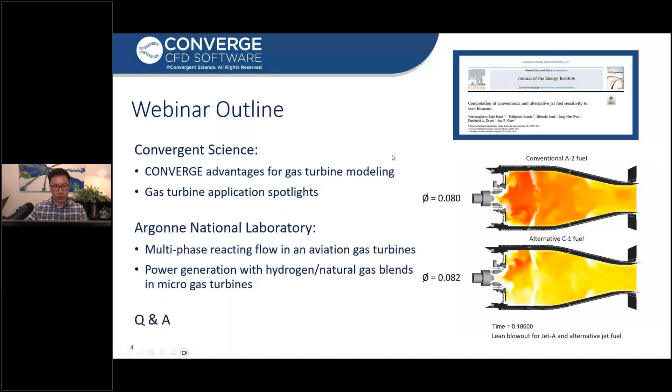One advantage of using Converge is its autonomous meshing capability. For instance, in this video you see on the right, the fuel is injected as Lagrangian particles. It evaporates, mixes with air, and combustion happens. The geometry of a gas turbine is usually complicated, with very small effusion cooling holes and large combustion chambers, which makes it challenging to manually generate the mesh. Converge has the capability to automatically generate orthogonal cells, as you can see here in the center region of the combustion chamber. The mesh is automatically generated, which spares the user time needed to manually generate it.

On top of that, Converge can automatically detect the regions where the change in temperature or velocity gradient is high, and the mesh in those regions will be automatically refined. As you can see here in the close-up view, in the regions where the temperature gradient is high, Converge automatically refines the mesh there. This feature is called adaptive mesh refinement.

And it can automatically resolve combustor flow and propagating flames at low computational expense.

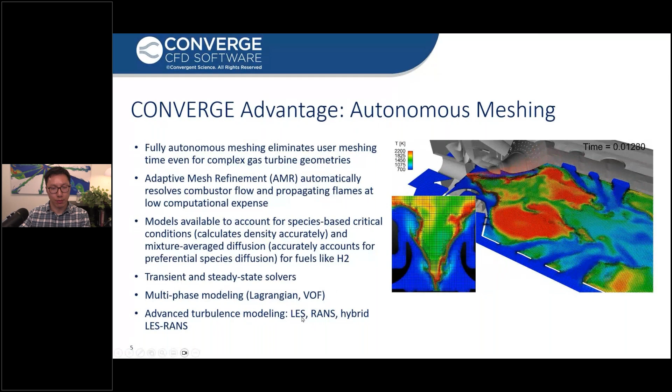You can also treat this as Eulerian phase using the VOF model. We have advanced turbulence models such as large eddy simulation, LES model, RANS model, and a hybrid of LES and RANS model.

Another advantage of using Converge is our detailed chemistry solver, which is efficient even with large mechanisms. It can accurately simulate ignition, premixed flame propagation, lean blowout, and emissions of NOx, CO, soot, and unburned hydrocarbons in gas turbines.

For instance, in this video, you can see that the fuel and air mixture is ignited at the center of one of the burners, and then the flame propagation is successfully predicted by the detailed chemistry. And at the end of the simulation, the flame propagates to relight all the other burners.

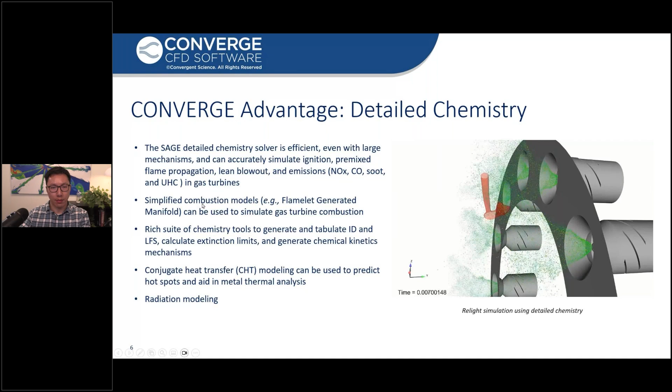One problem with using SAGE is that when you have a large mechanism, it's very time consuming. So there are some other simplified combustion models that you can use in Converge, such as the FGM model, that can be used to simulate gas turbine combustion at a much lower computational cost.

However, if your mechanism is small, then there's very little difference between using SAGE and FGM model, and SAGE is always recommended. We have chemistry tools to generate and tabulate ignition delay and laminar flame speed, calculate extinction limits, and generate chemical kinetics mechanisms, which I will talk about more later.

Converge has the capability to do conjugate heat transfer, also known as CHT modeling, which is important to predict hotspots and aid in metal thermal analysis.

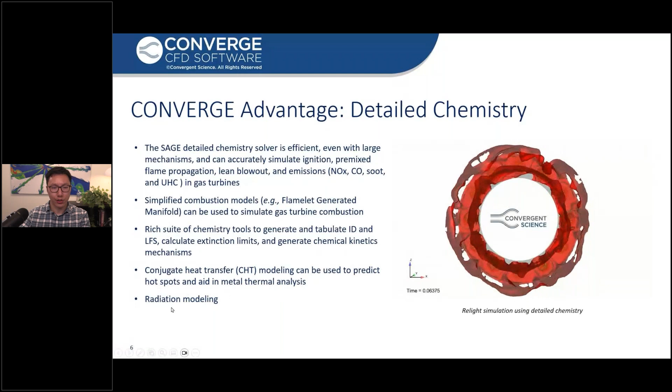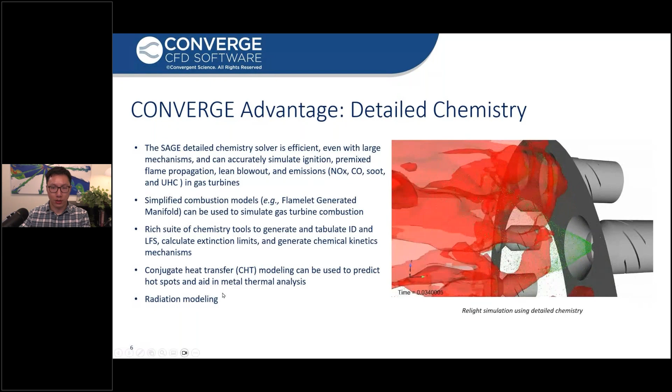We also have radiation models, which is an important effect in combustion, in gas turbine combustion. Without it, the temperature tends to be over-predicted because we didn't consider the heat loss due to radiation.

Converge has superior scalability, as you can see in this figure, with more number of cores. With our high performance computing capabilities, Converge simulation can speed up linearly.

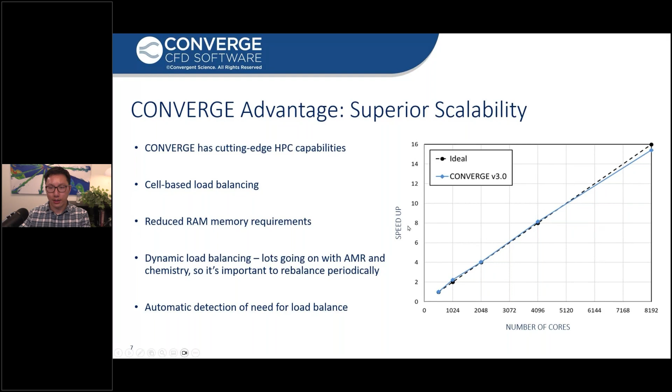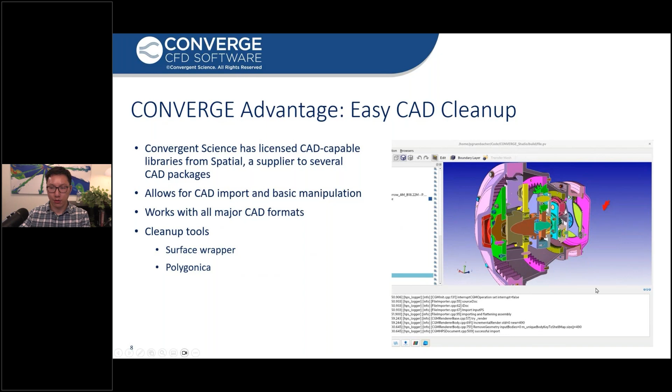We also have easy CAD cleanup. Our users can generate their surface geometry in third-party CAD software, such as SolidWorks, and then the surface geometry can be easily imported into our software. And if there's any surface defects, Converge can help you fix those defects by using the proper tool.

Converge has multi-fuel chemistry, which is a combination of research results from a few research institutions across the globe.

The integrated mechanism is called C3Mech version 3.5, which has 3,700 species and 16,000 reactions. This is a very comprehensive mechanism, and the user can extract part of this mechanism for a specific fuel.

Such as you can extract the mechanism for hydrogen, which only has 12 species and much fewer reactions. You can extract the mechanism for ammonia, natural gas, or a combination of multiple fuels.

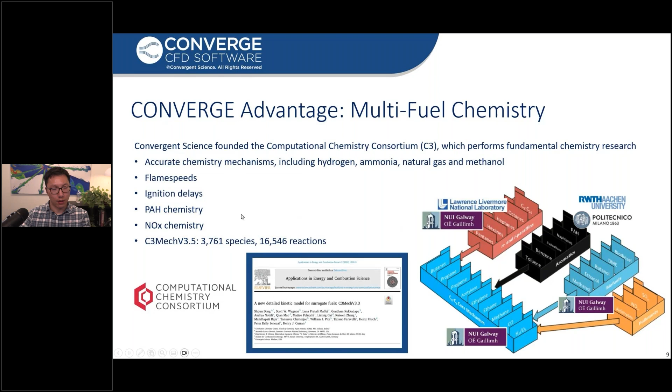The flame speeds and ignition delays under different operating conditions are validated with experimental results. And the C3 mechanism has polycyclic aromatic hydrocarbon chemistry, which is an important precursor for soot prediction. C3 also has NOx chemistry, which is useful in predicting NOx emission at the outlet of a gas turbine.

This video shows how the conjugate heat transfer simulation looks like using Converge. And as you can see here, the fuel is injected as Lagrangian particles. It evaporates into Eulerian gas mixed with air, and combustion happens, which has some high temperature region.

This high temperature flame will be in contact with the wall and heat that up. The wall has a thickness. The combustor wall has the thickness, and we can see here the temperature of the wall is predicted throughout the thickness using Converge. During this process, we used a feature in Converge called supercycling, which can predict the steady state solid temperature much faster than using a fully transient solver.

In the temperature contour on the right-hand side, this showcases a simulation only for the effusion hole. Below this effusion wall is a cold flow, and on top of it is the hot gas flow from combustion. There are some small effusion holes connecting these two regions, and the cold air flows through these tubes, coming into the hot flow region, forming a thin layer of cold temperature air on top of the effusion hole to prevent it from being overheated and melted.

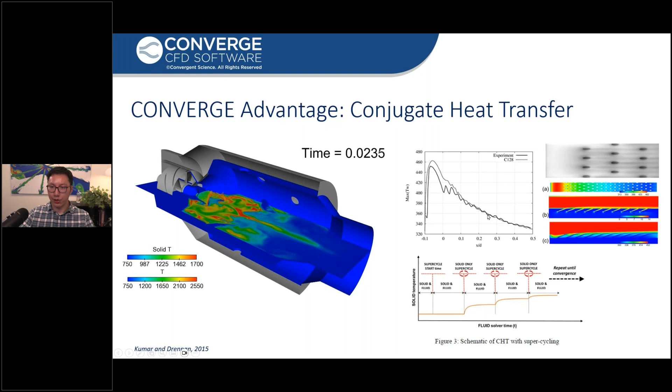Ignition modeling is important, especially for relight under high altitude conditions. This video shows a simulation where we relight one of the burners in the center, and the flame propagates from the center burner to all the other four burners.

The time used to ignite burners 1, 2, 3, 4, 5 is compared with experimental data. The left bar is experimental data, the right bars are simulation results from Converge. We can see that for each burner, the time used to relight them is very close.

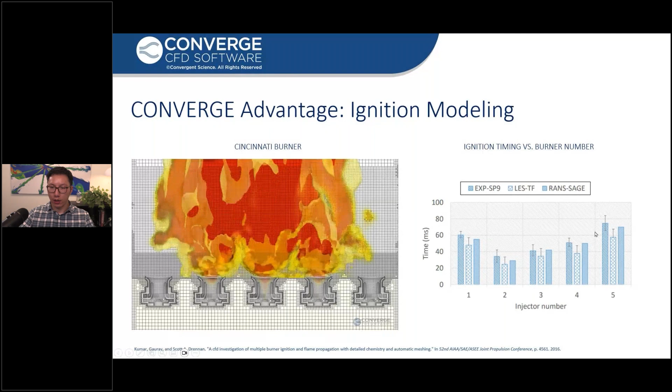Another important phenomenon in gas turbine simulation that we need to study is called flame flashback, especially when we have hydrogen added as the fuel, because of its high diffusion, flame flashback is easier to happen. It is critical to predict fuel and flow conditions marking the onset of flashback. The numerical prediction of flame flashback is challenging due to the complex interplay between unsteady fluid dynamics and chemistry, so it is important to use both the LES model and detailed chemistry models to capture the flashback.

The video here shows a simulation where methane, hydrogen, and air mixture comes into the domain from the inlet at the bottom. They go through the swirler, forming a swirling motion, and combustion happens in the combustion chamber. We can see that flashback happens with the flame crawling into the mixing tube along the center shaft all the way to the swirler blades.

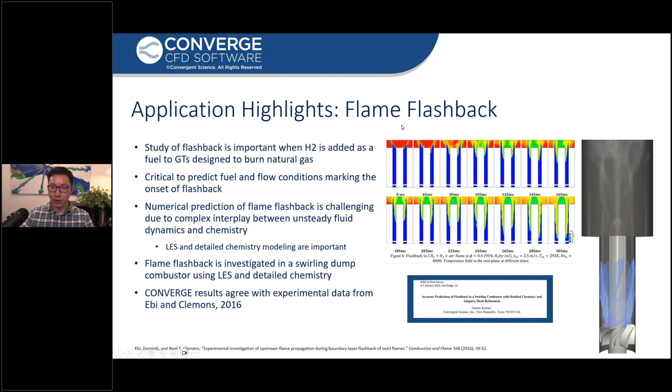This shows a temperature contour of the center cut plane of the simulation. It is clearer how the flame propagates into the mixing tube. The simulation results match well with the experimental data.

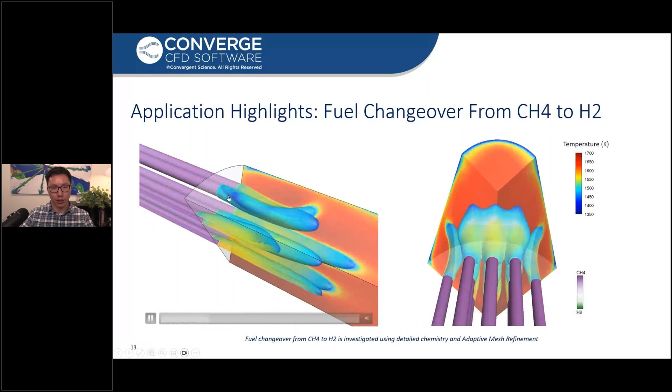These two videos show how the flame shape changes when we change the fuel from methane to hydrogen. At the beginning, the fuel is 100% methane, and we can see the flame is larger and rounder. When we gradually change the fuel to 100% hydrogen, we can see the flame becomes thinner due to the high diffusion of hydrogen, which makes the mixing between hydrogen and air earlier, so we have a smaller region of flame front. Also the flame speed of hydrogen is much faster, which tends to stretch the flame and make it look sharper.

This video shows a simulation of film cooling. The upper simulation has a higher velocity. Again, below this plate is cold airflow, and on top of it is the hot gas flow from combustion. We did two simulations: one with higher velocity and one with lower velocity for the cold airflow coming into the hot gas region.

As we can see here, the plate and the vertical center plane is colored only if the temperature is lower than the free stream temperature, meaning the plate is cooled down. We can see more region colored in the lower momentum case. That is because the cold air coming into the top region with lower velocity tends to stay low and closer to the plate, which makes it easier to form a thin low temperature layer on top of it, thus cooling the plate down. Whereas in the high momentum case, we didn't see as much area cooled down on the plate.

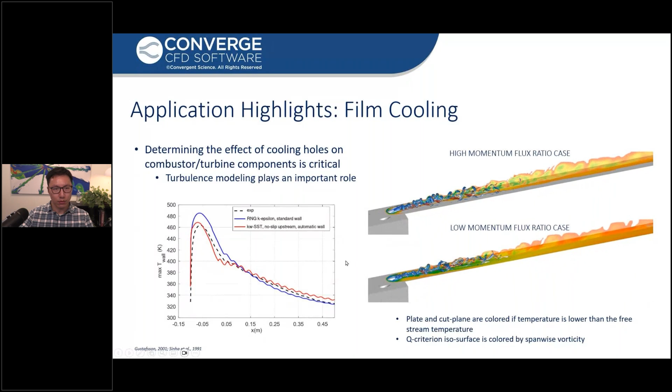This video shows the study of flame blowout for methane and hydrogen at different adiabatic flame temperatures. With methane, the blowout happens earlier at 1450 Kelvin adiabatic flame temperature, and with hydrogen it happens later at 1305 Kelvin. The results match the experimental data as well, and this is published in this paper.

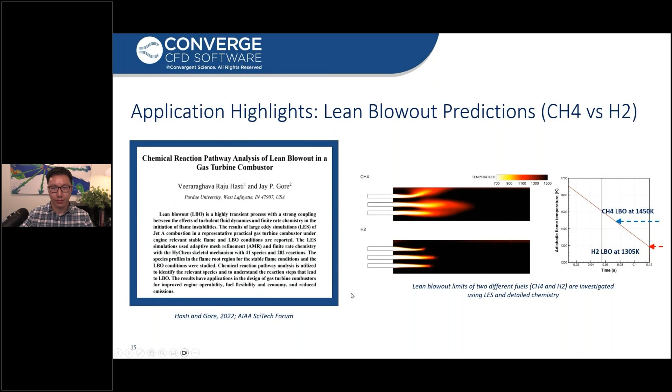The air is injected through these air tubes, and hydrogen is injected into these tubes through some smaller tubes on the side of the air tubes. They mix with each other, and the combustion happens in the center combustion chamber.

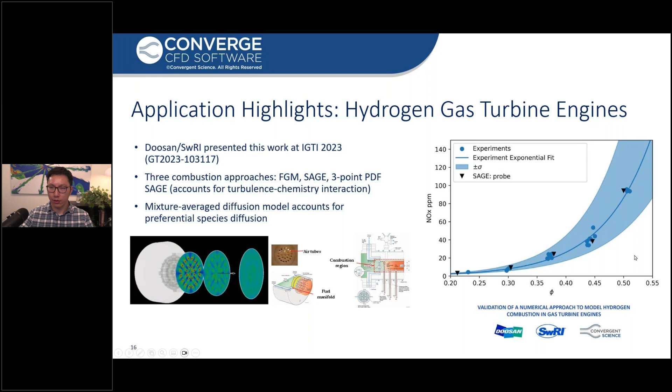We compared the NOx emission under different equivalence ratios. The triangle shows results from SAGE simulation, and the blue dots are experimental data. We can see a pretty good match from Converge compared with the experimental data.

This slide shows a power generation turbine. This is a scaled down practical power combustor. We have two locations where fuel is injected: the pilot, which is located at the center of the gas turbine, and another main inlet.

The pilot ratio is the ratio of the mass flow rate of fuel of a case to that of the baseline case. For the baseline case, the pilot ratio is 1. So when the pilot ratio is high, that means we have more fuel coming from the pilot into the combustion chamber, and that has higher CO because it is closer to equilibrium state.

When we have a lower pilot ratio, the CO will also be higher because combustion is less complete. This is called the CO knee, the drastic increase of CO, and Converge can capture this phenomenon successfully.

Usually we don't want the CO to exceed 10 ppm when we reduce the pilot ratio, because it usually means flame blowout or mechanical failure, and Converge can be a useful tool to predict that.

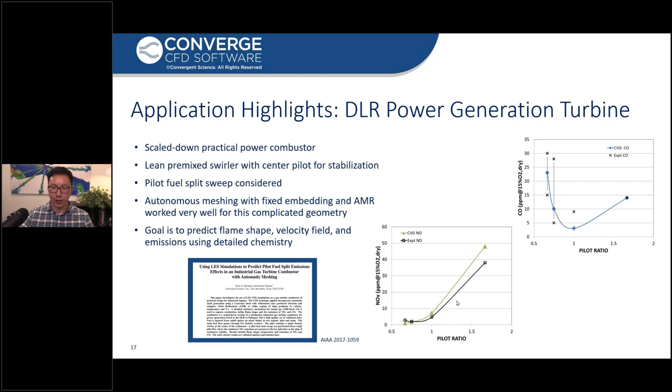For NOx, it is obvious that when we have more fuel coming in from the pilot, the flame is more stable and the temperature in the combustion chamber is higher. NOx is usually generated in high temperature regions, so with higher pilot ratio, we have higher NOx.

This is the last example I want to show you, which is a noise and combustion instability study using Converge for a gas turbine. This is the geometry of the simulation.

We can see methane is injected through the annulus outer inlet. The mixture of oxygen and water is injected at the center. They mix for a very short distance, and the combustion happens in the combustion chamber.

This figure shows that we have enough cells across the heat release region. When we plot the kinetic energy spectrum versus frequency, we can see most of the energy is in the large eddies, and for small eddies we have the -5/3 slope.

Shown on this figure, which means we resolved the inertial subrange, and the mesh size is fine enough.

This figure shows the pressure fluctuation, defined as the difference between the time-averaged pressure and the instantaneous pressure. We plot the pressure fluctuation for 9 cycles, which is the blue line. It matches the experimental data very well, shown as the black dots. The periods match each other, but the prediction has slightly lower magnitude.

I'll also be talking about some hydrogen microturbine simulations we've done, funded by Argonne's Laboratory Directed Research and Development Program. I'd like to thank Convergent Science for the licenses. A lot of the microturbine simulation work I'll talk about today was done by my postdoc, Dr. Joshua Christopher, who's currently at NASA Glenn.

The simulations were performed using computing resources here at Argonne on our Laboratory Computing Resource Center. So I'll first begin on the aviation gas turbines side, specifically focusing on the multi-phase reacting flow side of things. As already introduced in the first half, gas turbines have a slew of complex flow fields going on inside these combustors.

You have the spray, you have a complex flow field, then there's subsequently a flame, and all of these are interacting with one another in a very dynamic manner. CFD can really help understand a lot of these interactions and the governing processes, and then help us further understand, as we look at different fuels, what different fuel behaviors are there, or what design changes might be required. So you can really understand the dynamics at stable behavior and for rare events, which are sometimes how fuels are assessed in terms of lean blowout, high altitude relight, and cold start ignition, all of which were discussed briefly previously.

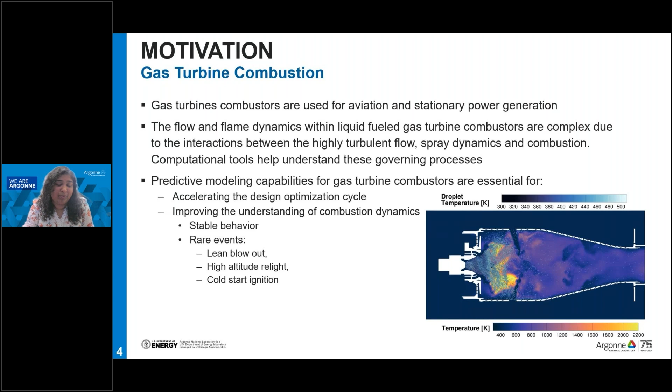So the configuration we are focusing on for the aviation side is the AFRL referee rig combustor. This is a single cup realistic gas turbine combustor with all the different complex flow paths. And again, Mingyi already talked about some of these things.

So you have the inflow coming in that's split into multiple different air paths, one going as swirling air through the swirler. Then you have the flow coming in through the dilution pipes and the effusion air holes. And then there's a fuel injection happening in the center.

So all of this is leading to this rich burn, quick mixing, and then a lean burn combustor. So this is an RQL type of configuration, and was developed with inputs from industry partners. It works as a very good relevant reference gas turbine combustor for aviation applications.

A lot of the work done on this in the past has obviously initially looked at some of the validation part of it. So this here summarizes the model's setup details and some of the mesh information, and I'll touch upon the mesh information a little bit again in the subsequent slides.

But there's a base grid that we use of 3 millimeters with minimum grid sizes in the primary zone and from the effusion holes, which sits at about 187.5 microns, leading to an average cell count of about 21 million cells.

So this is using large eddy simulation. This is not a very coarse LES, but this is also not a very refined LES. So it somewhere sits in that happy middle of really being an engineering LES, which still lets us understand a lot of what's going on in the dynamics of these behaviors.

The combustion model we've used here is SAGE with the fuel, which is A2, which is typically a nominal jet fuel. So it has very average or nominal properties of what is typically available as jet fuel. And we've used a mechanism which involves multiple species and multiple reactions.

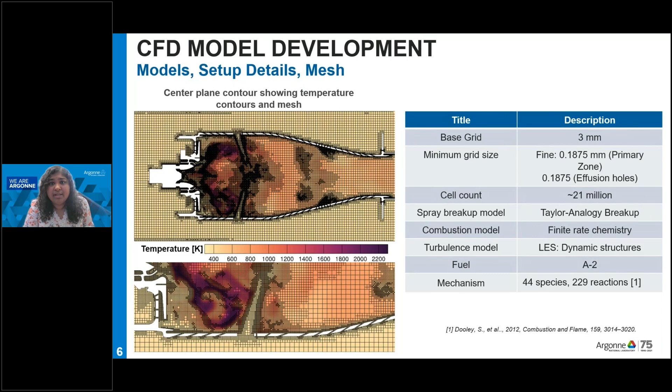A critical part of doing these gas turbine simulations and getting closer and closer towards the predictive side of things is looking at different initializations. So obviously we had the boundary conditions that were very well characterized for the flow that came from the experiments, but we also had information on the spray initialization, which came from PDPA measurements, or phase Doppler particle analyzer measurements, done downstream.

This came from the experimental team itself, extrapolating that information close to the nozzle exit, and that was then done as a series of 6 rings, as you can see in the figure on the left hand side, with the droplet diameter distributions prescribed for each of these 6 rings or 6 injectors, so as to say very close to the nozzle exit. The other information, in terms of the spray angle, a hollow cone, and the definitions of the hollow cone, all of that also came from the experimental counterpart.

The table summarizes the boundary conditions. As I said, they're very well characterized boundary conditions.

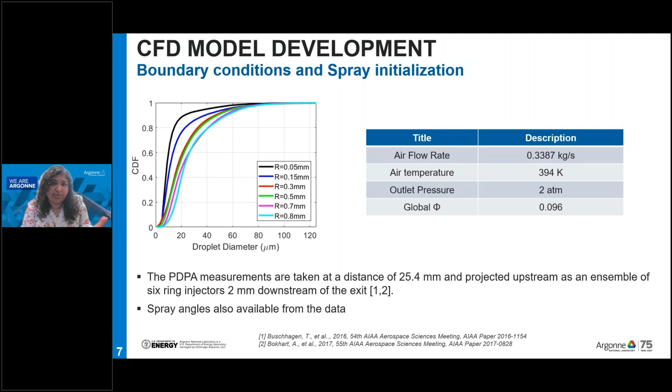We also had a lot of information on how the airflow was splitting into different sections, which I'll cover in the next couple of slides.

Looking at grid sensitivity, we started with a mesh with a base grid size of 3 millimeters, and we changed the minimum grid sizes to different levels. On the right-hand side, you can see the flow split going through the swirler, the dilution holes, and the effusion holes, and how they changed as we looked at changes in the minimum grid sizes.

For the swirler, by the time we reached level 3, which was 0.375 millimeters or 375 microns, we had reached good convergence for the non-reacting flow. For the dilution holes and the effusion holes, that convergence happened at level 4, which is 187.5 microns.

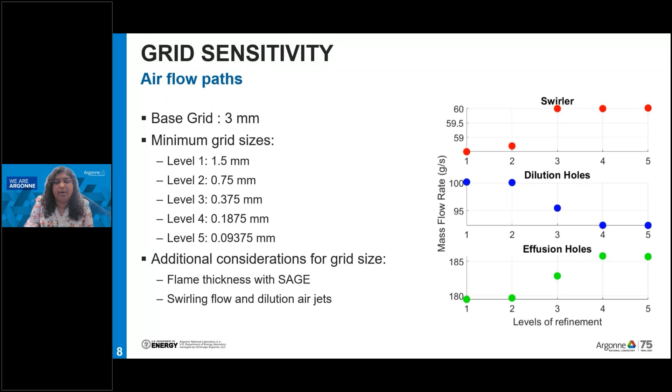Based on all of this information, these were the grid sizes we used with embeddings for these specific regions. We also used adaptive mesh refinement, and the decision for picking the level of refinement required was determined by the flame thicknesses, the swirling flow, and the dilution air jets and their interactions. Overall, even for the case with AMR, we went with 187.5 microns, the level 4 grid refinement.

With all of that grid refinement considered, we looked at the flow split through the different air paths on the left-hand side. These are the different flow paths through the swirler: the inner axial, the outer axial, radial, and cooling.

We had this information coming in from the experiments, and from the simulation standpoint, we divided each of these into separate regions so we could monitor the flow going through them. The experiments are presented in blue and the simulations in orange, and the table on the right summarizes the values. With the grid information I presented previously, we see pretty good agreement between experiments and simulation.

Probably the maximum difference we see is with the cooling flow path, which was a 23% difference. But the numbers are actually very close to each other, between 2.89 and 2.22.

We also did this for the bigger flow paths, the entirety of the flow going through the swirler, the dilution air, and the effusion air, again with blue for experiments and orange for simulations. We see pretty good agreement, which gave us confidence in the grid sensitivity and the mesh resolution we picked.

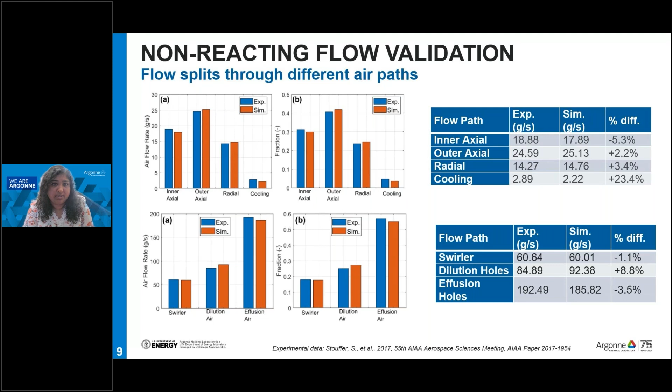Next we looked at the non-reacting spray validations. On the right-hand side, at different axial locations marked by X, you see the Sauter mean diameter, or SMD, distributions, with experiments in black dots and simulations in red dots. As expected, we see the anticipated hollow cone characteristics.

There are more deviations closer to the nozzle exit, and further downstream the experiments and simulation match better. Part of that is attributed to extrapolation done by the experimentalists to get appropriate boundary conditions, so there's still some residual change that needs to take over as the flow and spray interact.

Overall, at all axial locations, within the ballpark of what the experiments predict, we see pretty good trends in the radial distance at these different axial locations.

We also looked at the axial velocity at the same different locations, marked by X. Again, we see pretty good agreement between simulations and experiments, particularly close to the nozzle. Further downstream some differences are noted, but the peak values are still captured well, and the trend of peaks shifting radially outward stays consistent.

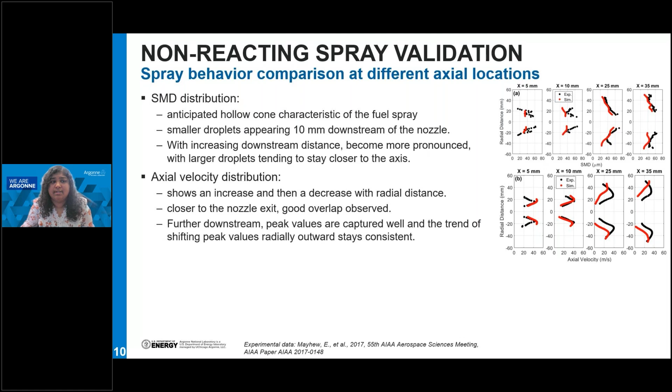Finally, we looked at the radial velocity distribution, and again close to the nozzle exit we can see very good overlap.

And as we move further downstream, again, similar to what was noted for the axial velocity, the trend of shifting peak values radially outward, we still see that between the experiments and the simulations pretty well. This also suggests that the spray cone angle is modeled well.

So overall, the Lagrangian model that we're using, tied with the evaporation models in the LES, does predict the spray behavior in the near nozzle region reasonably well, which gives us the confidence to move to the next step, which was the reacting spray flame validation.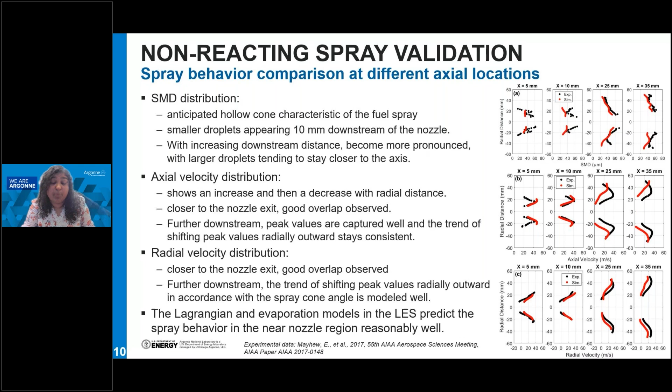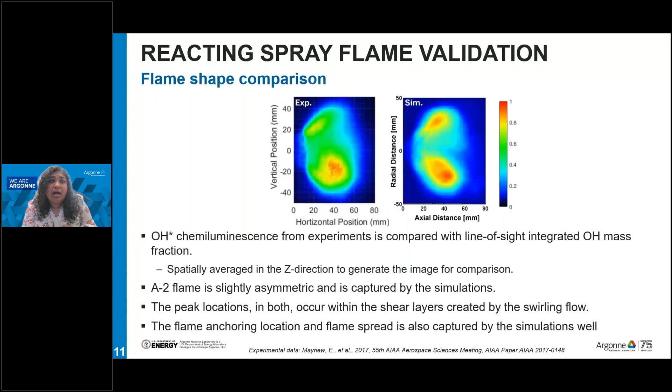The next thing that we did was looking at the lean blowout for this fuel, which is A2. The fuel ramp down procedure is followed very similar to what's done in the experiments.

So they typically ramp down the fuel flow rate, and the way we ramped down in the simulations was just using the spray initialization and the mass flow rate control for the spray initialization, and we were stepping that down for different global equivalence ratios.

So we went from 0.096, that's where we started, went to 0.09, and then stepped down further, as you can see in the plot on the left hand side.

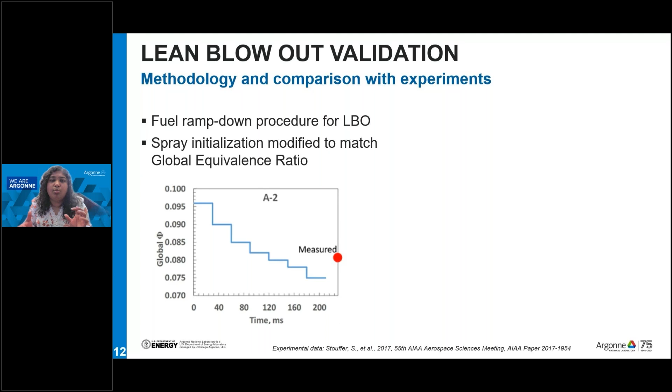We then replicated the step down process as well, once we got to a specific number, with a different step size, just to ensure that there was not an influence of the step down process on what was being predicted as the lean blowout global equivalence ratio.

An example of that is shown here for the baseline A2, wherein the heat release rate is monitored in order to give us this LBO global equivalence ratio. You can see that beyond a certain equivalence ratio, the heat release rate starts dropping significantly, and that was tagged as the global equivalence ratio of lean blowout for this baseline A2.

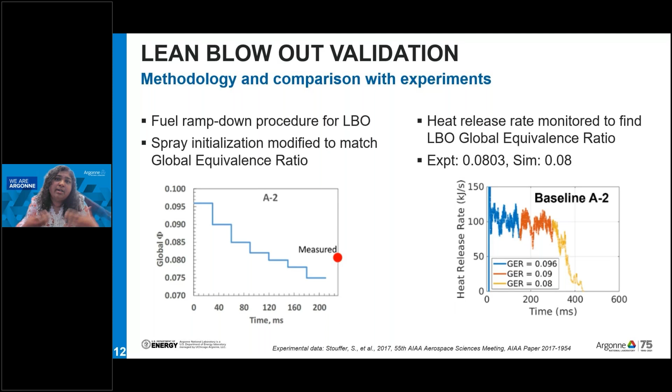So now that we had a very well validated model starting from the non-reacting spray, reacting, and lean blowout, we then wanted to use this model to understand the influence of sustainable aviation turbine fuels.

As we can understand, all these fuels have a lot of complex physical and chemical properties that influence a lot of the different physics that happens within these systems, starting from the internal flows of atomization, the vaporization, the combustion, and subsequently having impacts on emissions and contrails.

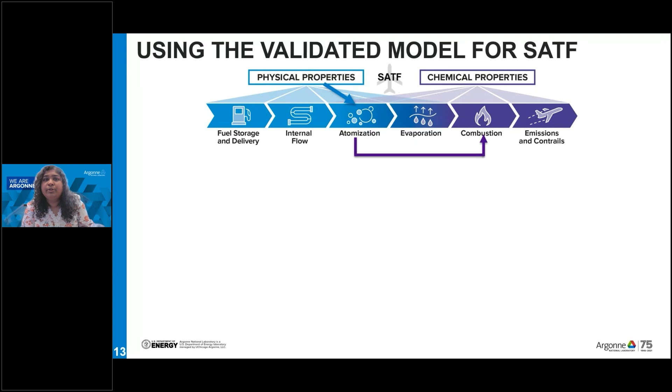So what we wanted to understand was the impact of atomization on the subsequent combustion behavior, because we know that changes in physical properties do impact atomization. So really, this is the question that we wanted to target and understand.

So what we did was we had the baseline spray droplet initialization, and we changed the mean of the droplet diameter by plus minus 5% and then plus minus 10%, retaining the same distribution. We did not do any changes to the fuel physical properties, the spray velocity initialization, the chemistry part of it, or the fuel mass flow rate. So the only thing that we changed was just the droplet sizes and their distribution to understand this impact.

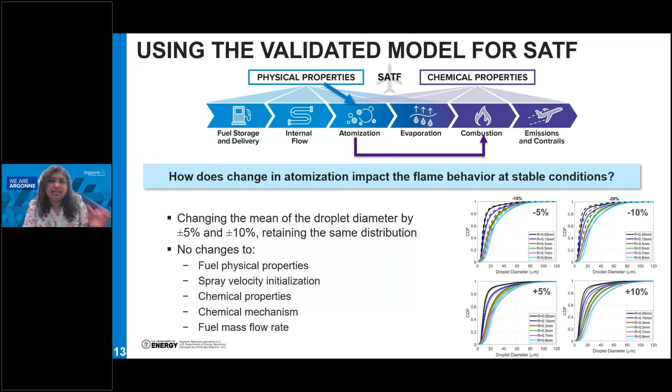So we first looked at global characteristics. The global characteristics here first show the heat release rate for just the baseline case, which is the baseline A2.

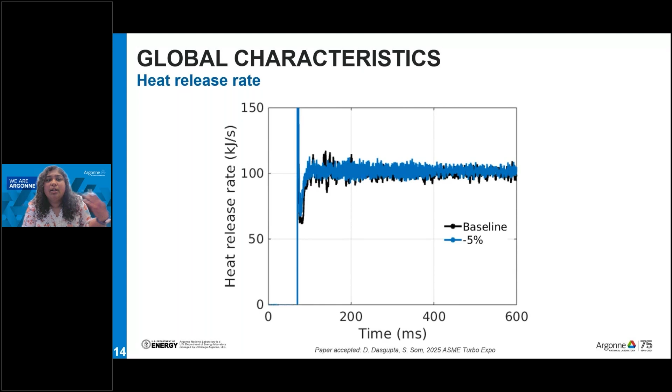Then we overlaid the minus 5%, plus 5%, minus 10%, and plus 10% cases. Overall, there's not a significant difference in the global characteristics. One reason for this is that the operating condition we picked is well validated and characterized, at an air temperature of 394 Kelvin. At this temperature, the vaporization process is pretty quick, so a lot of the governing behavioral changes are probably dominated more by chemistry than by spray behavior. With these small changes in droplet sizes, we don't see a significant difference in the global characteristics.

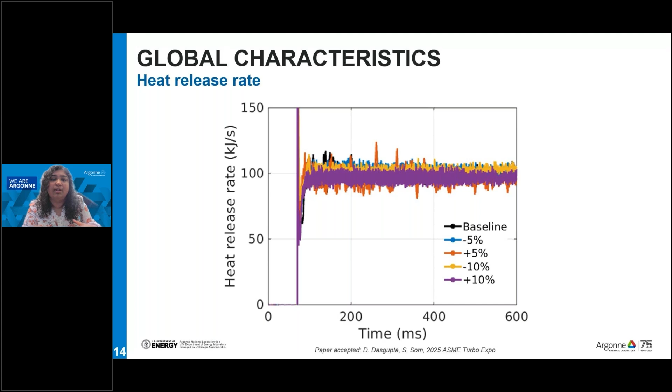However, we still wanted to understand more of the localized behavior and localized changes, because these can subsequently impact durability. If the flame shape changes significantly, if there's impingement on the walls, or if heat transfer behavior changes, all of that has long-term consequences, even if the global characteristics don't show changes.

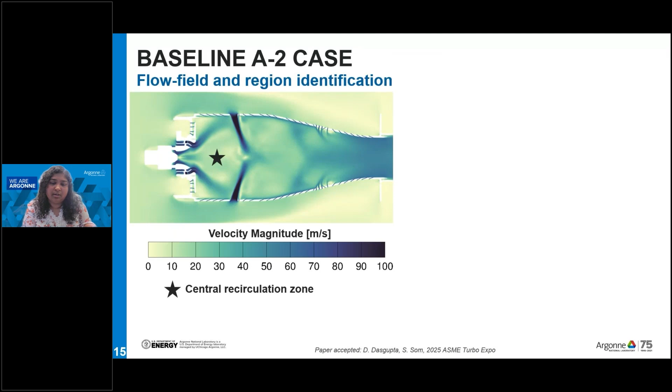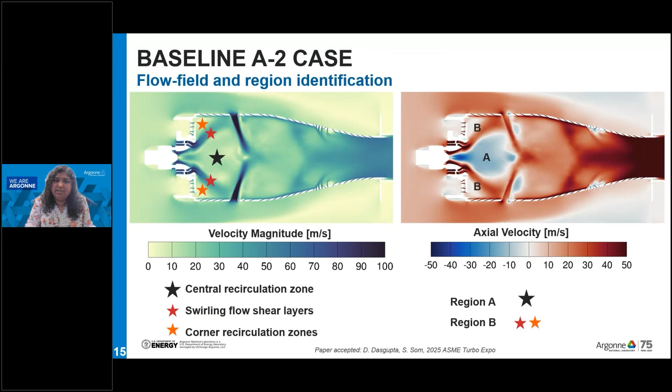So to understand this behavior, we looked at defining different regions within the flow. This is a center plane slice of the referee rig showing velocity magnitude, with the critical flow features: the central recirculation zone, the swirling flow shear layers, and the corner recirculation zones. We divide this into region A, comprising the central recirculation zone, and region B, comprising the corner recirculation and swirling flow shear layers. We wanted to analyze what happens in region A versus region B, as both regions are close to the nozzle exit.

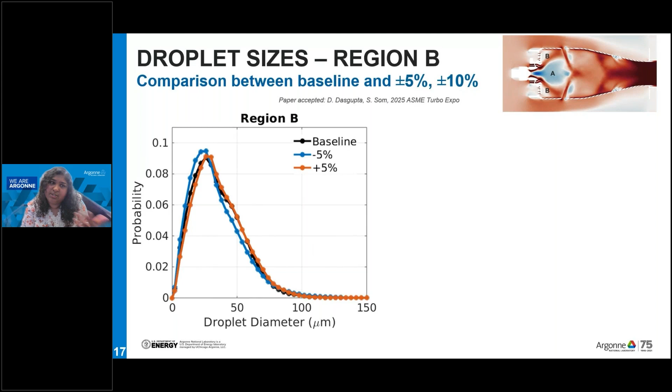Now focusing on region B, outside the central recirculation zone, looking at the baseline, the -5% case shows a very slight shift towards the left, and the +5% case doesn't show a significant shift - it's almost overlaid with the baseline. Similarly for ±10%, on the reduction side we see a shift towards smaller sizes, but when we increase it, we don't see a significant shift. So overall, when reducing sizes we see the distribution shift towards smaller droplets. We do see different variability or sensitivity of droplet sizes in these different regions close to the nozzle exit, and how they respond to smaller and larger droplet sizes.

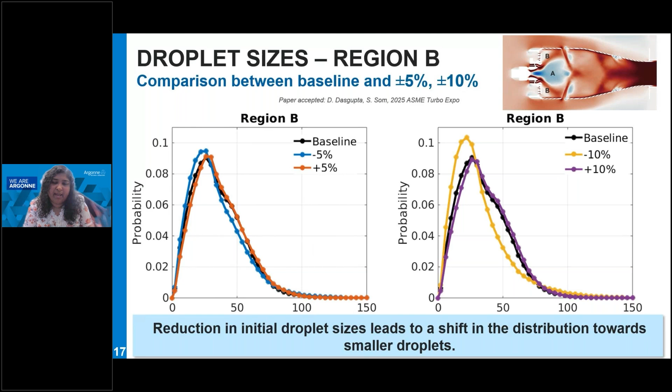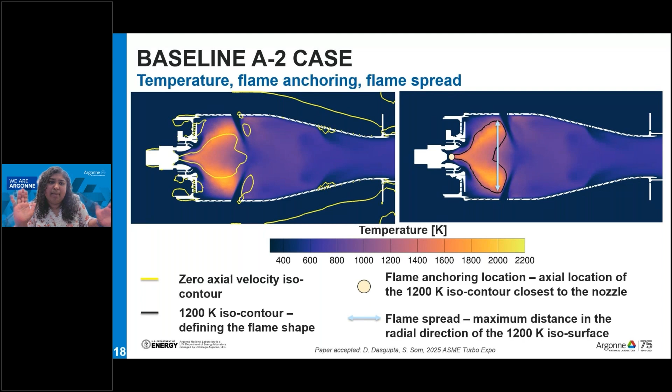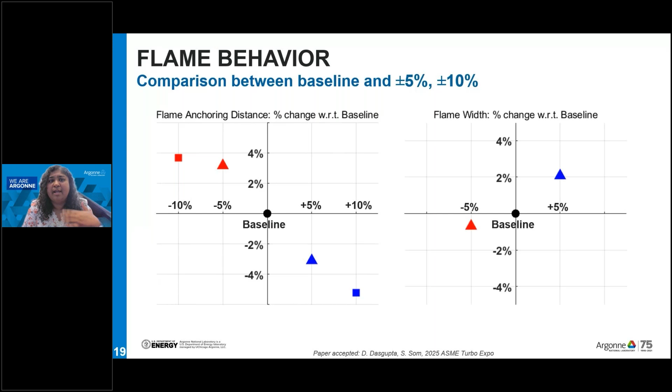The consequence of that is really in flame behavior and flame dynamics. The next thing we looked at was temperature and flame anchoring. We defined this using the 1200 Kelvin isocontour, with flame anchoring location defined as the closest point to the nozzle, and spread defined by the maximum distance in the radial direction. With the baseline sitting at the center, we notice shifts in flame behavior for these different cases, with flame anchoring distance on the left and flame width on the right, suggesting localized behavioral changes as we look at changes in droplet sizes.

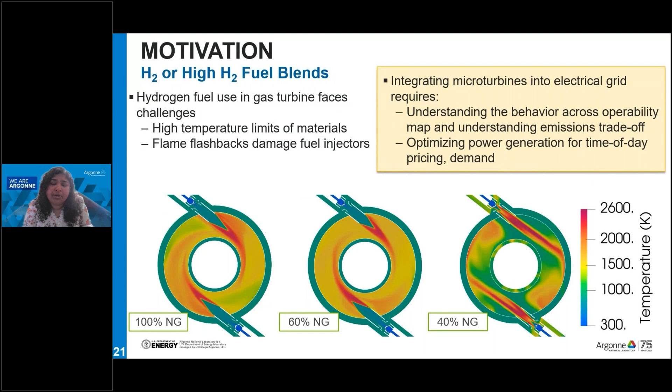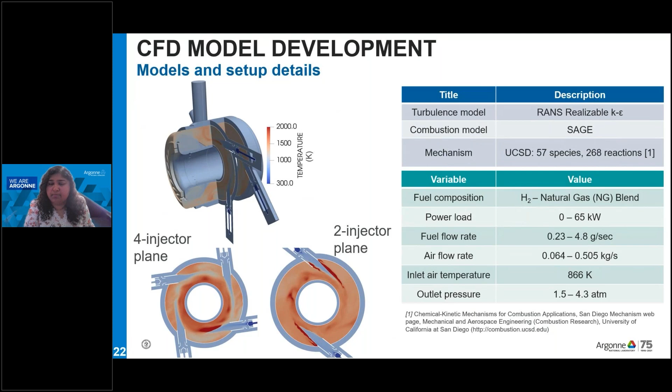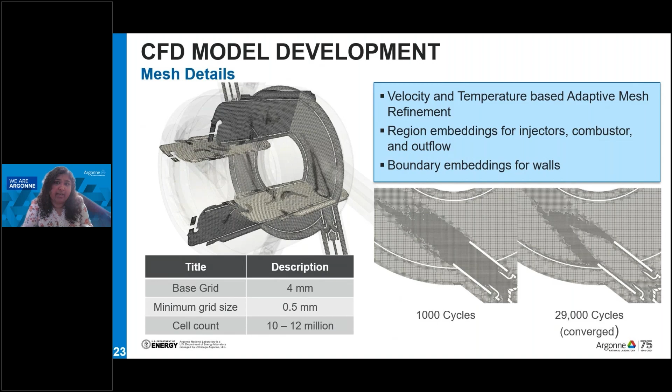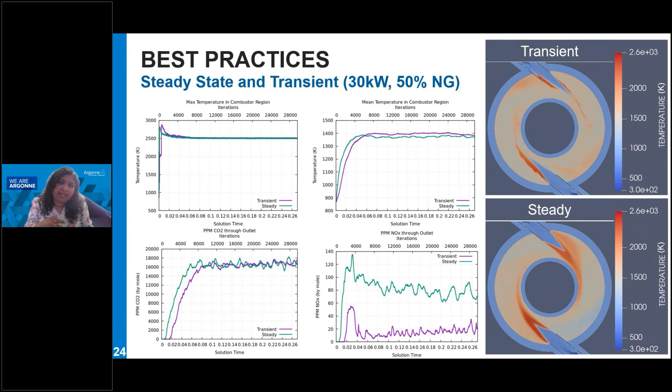Whereas the steady case, for the most part, shows a stabilized flame, which is not necessarily representative of this specific realistic condition at 30 kilowatts. As part of this, we understood where steady state simulations could help us out and where we had to use transient simulations, and some of that was also shown through the emissions results.

With that, I hope I've given you a preview into some of the work we've done here at Argonne, looking at aviation gas turbines, hydrogen gas turbines, and micro turbines in this specific case, using Converge. We've also applied it to other applications, including large scale hydrogen gas turbines, different sizes of aviation gas turbines like a mid-size RQL combustor and a small size combustor based on the trapped vortex combustor concept.